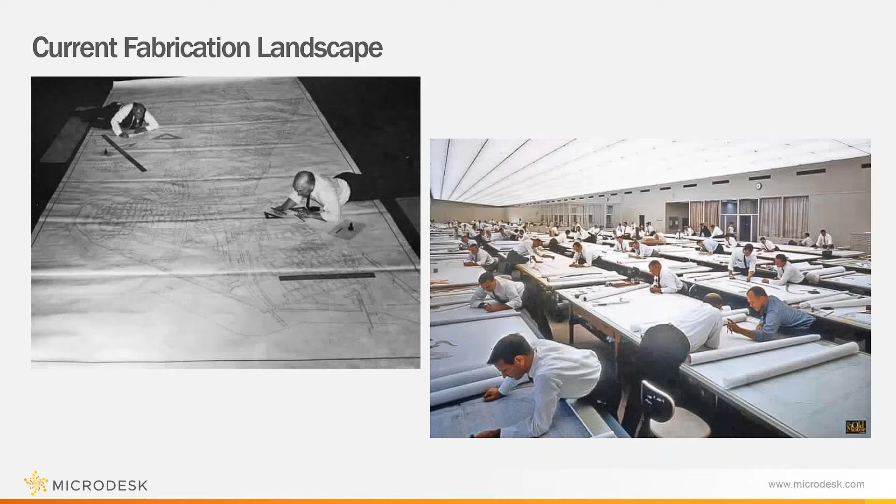It's still critical to this day. So I always like to remember, what was the point of this in the beginning? It was to get ideas on paper very accurately.

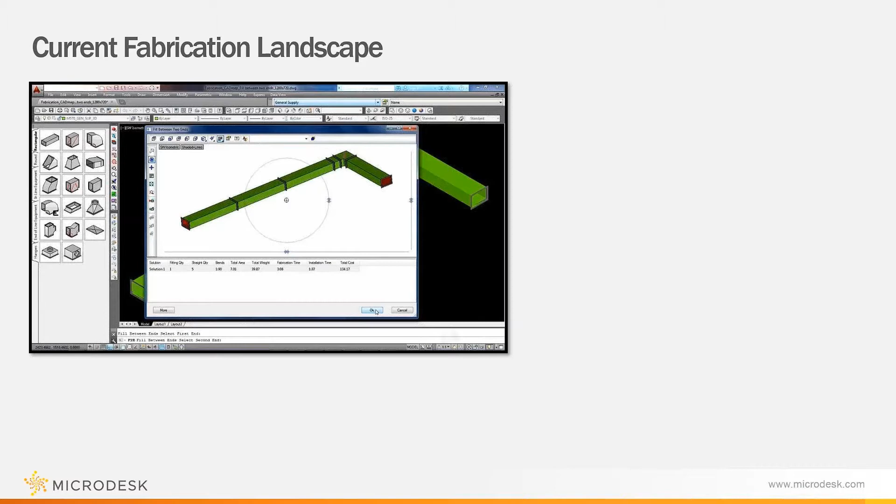Fast forward, today we're using very sophisticated software to create 3D versions of models, which also now contain data, cost, and hours to install. From here, we can send these digital representations to the real world to cut patterns and actually build directly from our designs and fabrication software.

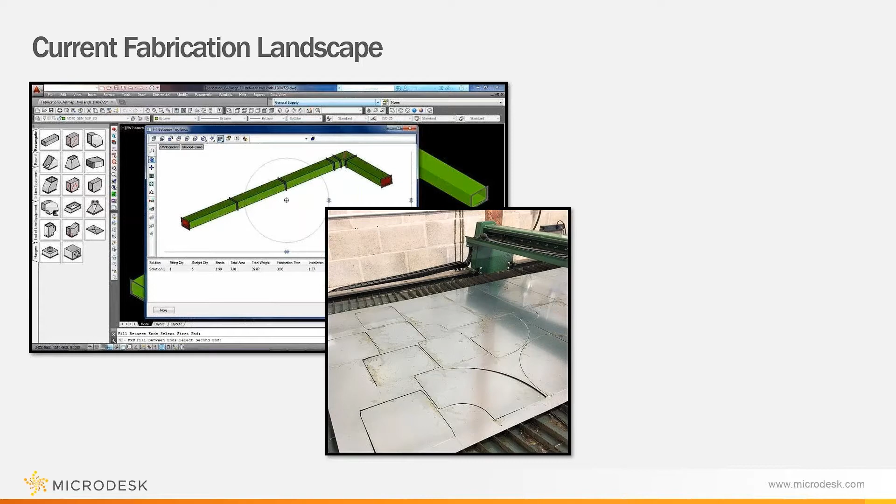In recent years, we've also started looking at coordination. It's one thing for us to build our sheet metal from software, but to coordinate all of that when the design teams or other contractors aren't in the same location or even the same part of the world—these are the things we're seeing, and we're doing a great job of coordinating these projects so that out in the field, we're minimizing RFIs, change orders, or just wasted time in general.

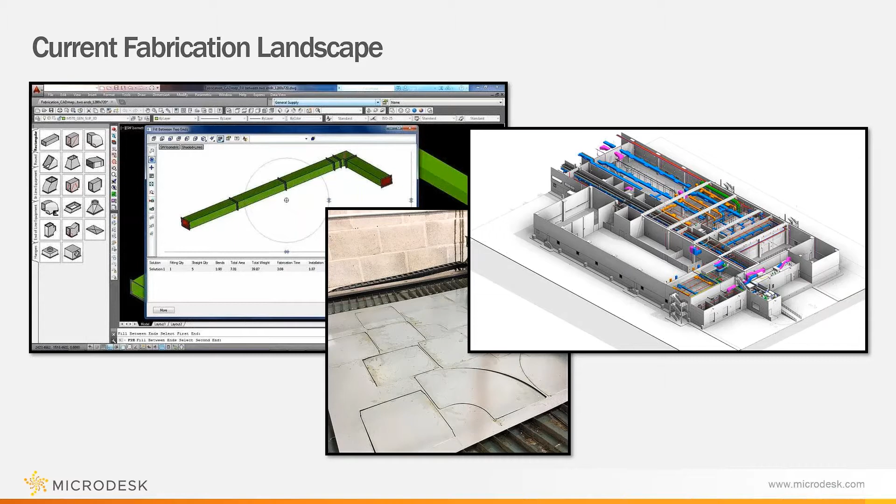So where are we going from here? Where are the trends? I think the big one is this new digital design lifecycle, where the owner at the end of the day wants to see all of the information that the design teams, program managers, and construction firms have added as an investment into the digital information of the project. They want to put a bow on all of that information and have it during the ribbon cutting, so that if we need to look historically at what happened, it's almost the memoir of this project.

This is really the common thread through projects these days: we need a means and a method of taking the information as it's injected into each phase of the project and making sure it's accurate, conforms to what the owner wants, and also making sure that when the baton is passed from the design team to the pre-construction team, that information stays true throughout and is readily accessible.

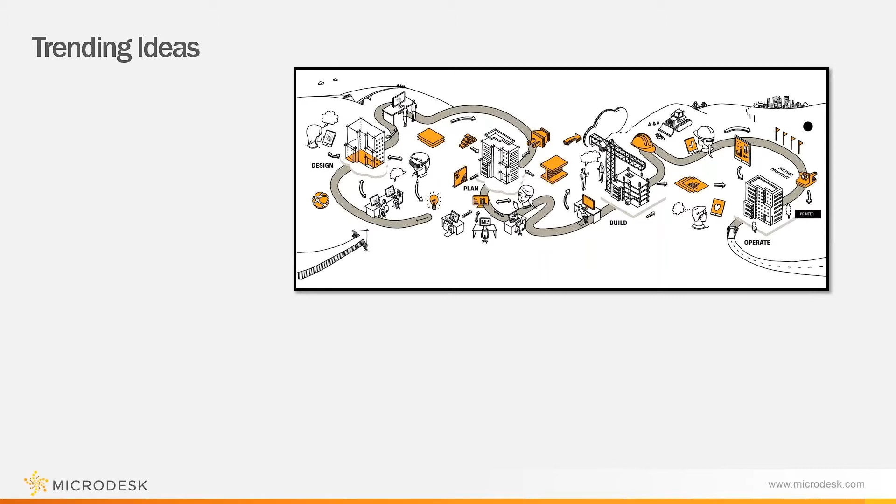As these designs become more sophisticated and accurate, we start to really look at whether they're truly digital twins of what's happening out in reality. I think a lot of folks want that. That's kind of where we want to get—almost an augmented reality where I could hold up my BIM model through VR goggles or on a tablet, look in the real world, and see that it actually was built the way we planned it. While we might not look for 100% perfection, we are striving for as realistic of a digital model as possible.

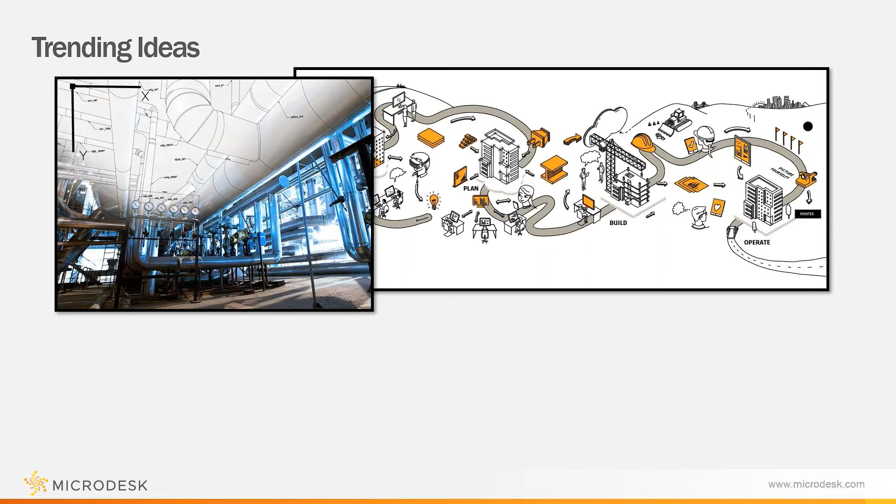I think what ends up happening is now we no longer have a single source of truth. So what is the latest version of the drawing? Is it the one on the iPad? Is it the one that I printed? And which one do I build off of? This is a very real problem we're seeing during design and, most importantly, during construction—I'm out in the field and I need to know, am I going to hit something if I run this steel, or what exactly is supposed to go where? It's up to the project teams to come up with that single source of truth to say, here's the latest and greatest version of that information that you need, and anything else is uncontrolled.

And we need to craft that solution. So when we think about all of those things together, the back of the house folks who sign the checks go, well, that's great—we've spent all this money investing in all of this digital technology, and the goal is for us to ultimately save money on these projects. We want to reduce RFIs, we want to increase safety, coordination should have been done at a desk rather than in a field, and that should all equate to profit. But how do we really make that happen?

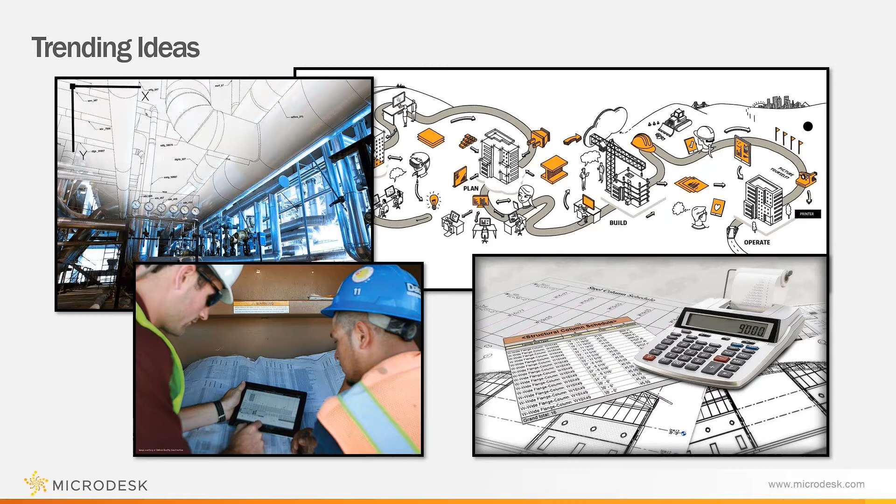They take up a lot of real estate up in the ceiling, so coordination is key. But it's also very time intensive for us to create these fabrication models. They're massive models with a lot of information in them, and we need to create documentation from there as well. So the tools that we're going to look at today are the spooling tool, the hanger tool, fabrication properties, renumbering, and tagging.

Spooling is a way of us taking some lessons learned from some out-of-the-box features of Revit in creating assemblies and just adding some nice quality of life features to them to align better with realistic workflows.

The hanger tool is just really a lifesaver when it comes to large projects. We can quickly lay out dozens, hundreds, maybe even thousands of hangers in a single click or a couple clicks based on some requirements. And what I like about it is that it also leverages the existing fabrication database, so it's a very controlled and expected set of hangers. Your modelers can't go off spec to put a hanger in.

Fabrication Properties is a new one to the list, and what this does is it kind of cracks the hood on the fabrication database within Revit to allow you to see some of the properties of each of the components that you're modeling from the database that currently aren't exposed in the traditional sense. And we can even kick those out to Excel for some data manipulation down the road.

Renumbering and tagging are really when it comes to the detailing side. We want to make sure that our bill of materials has logical numbering for our parts. And we want a means of consistently tagging our parts with numerous tags and making sure that the drawings look organized.

So what I have here is a somewhat nominal sheet metal and some piping model here in Revit. And these are all fabrication components that are modeled. And I have some equipment.

The first thing that I want to do is show how BIMrx looks from a ribbon perspective and the user interface. Microdesk has a suite of many other tools under the BIMrx umbrella that we're not going to be showcasing today, but we are going to be looking at fabrication.

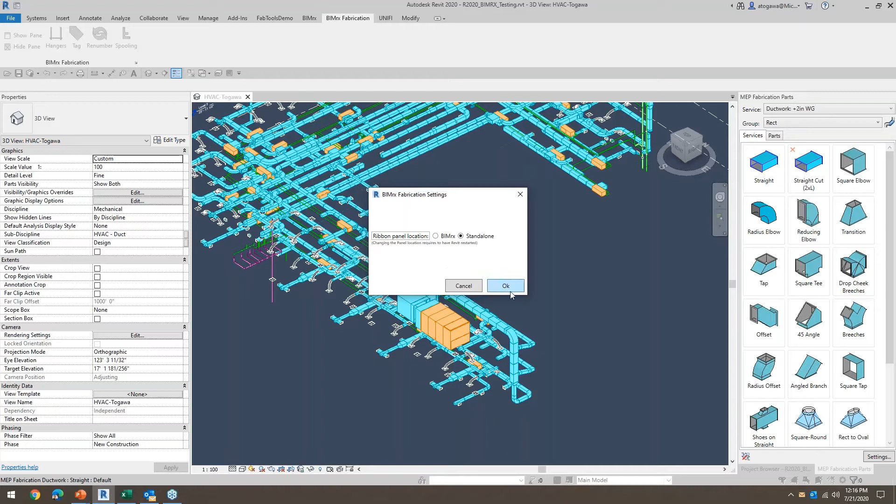One of the nice things about each of these tools is that there's a little feature which will either have it be standalone, which is what I've done for fabrication to make its explicit own tab, because as many of you power users on this call might know, there are a lot of tabs on Revit of add-ins, and it's nice to be able to either collapse it back into the master tab or break it out explicitly if you need that. So I've broken this out explicitly, and I'm even going to drag it down here so that I have it more readily available.

Another tool is BIMrx Core. This is a means of linking Revit, both importing and exporting, to Excel. I might leverage that again today, so I'm just going to keep those down here in the event that I need them.

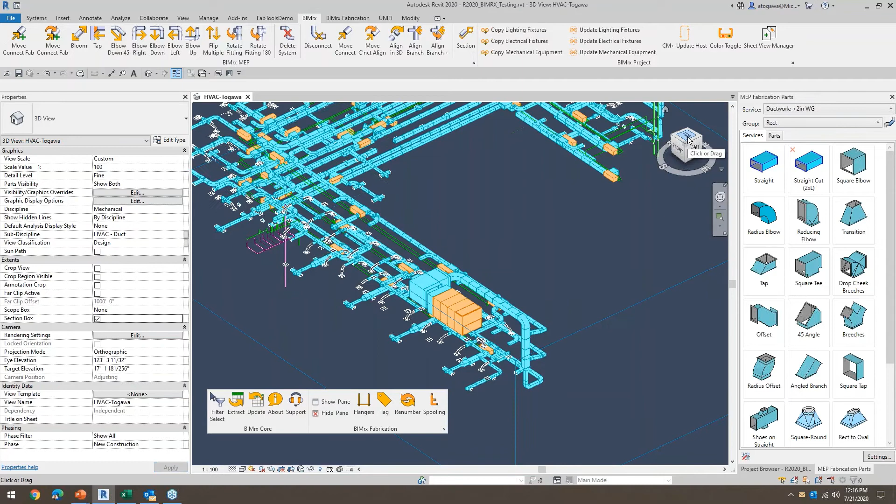What I'm going to do is create a section box, and I'm just going to work on a particular area of this work. And what we're going to do is start with some hanger layouts. So I'm going to crop this down to the area that I need.

And this is where we're going to be working today.

What I'm going to do is begin with laying out some hangers on this particular run that's going horizontally. So I'm going to click on the hanger tool. And the first thing we get here is the distribution settings, which are the distances between hangers and the distance from the start.

We have an option to attach to structure. What this does is take the fabrication hanger and shoot the rods, or the upper attachment, to a structural member, specifically slabs, vertically north or up from that hanger. And if it can't find any, it basically goes all the way up to the level above, to that level elevation.

And then attaching location points—this is for Revit native hangers versus fabrication hangers. Both of these are used for exporting to do site markings out in the field for embeds or deck inserts. As we know, fabrication hangers have these natively, so this option is added if we're going to use Revit families. We're only going to be using fabrication today.

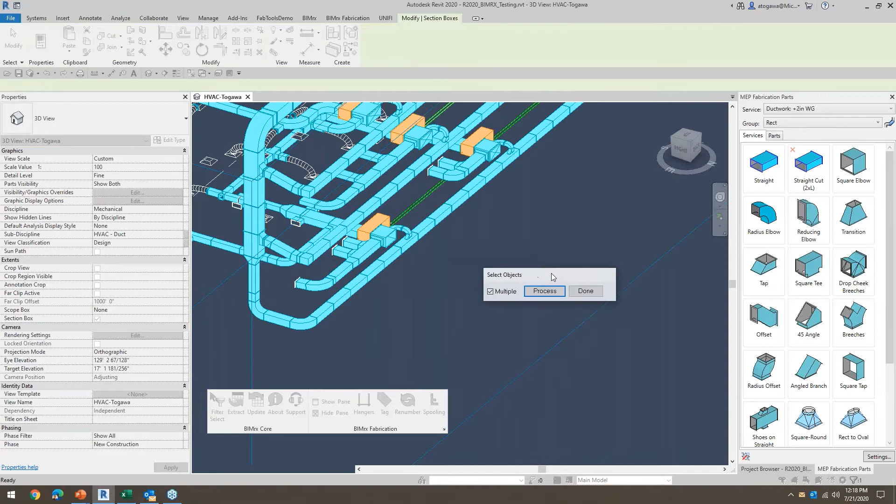So I'm happy with my 6-foot spacing, and I'm happy with my 12-inch from start, and I'm going to click OK. Then it's going to ask us to select the components that we need to hang.

I'm just going to hang a couple for now, just to show you how it works, and then after that we're going to look at a larger scale application of this. So I'm going to click on these two parts, and I'm going to click Process.

The tool then recognizes the service name from the fabrication database, and based on that service, these are the hangers that are available. I'm going to go ahead and click on trapeze hangers, and I'm going to click OK.

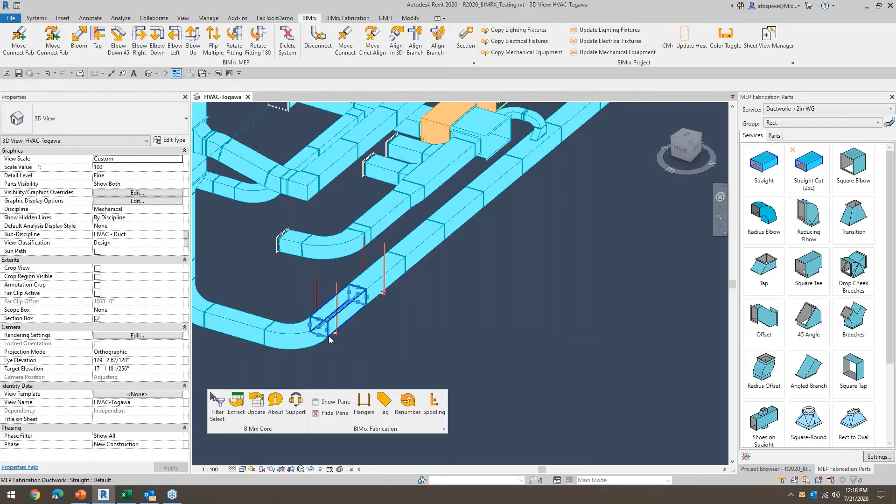You'll see that it placed them 1 foot from the beginning or end of this joint, and then 6 feet apart. And that was pretty quick.

What I'm going to do is show this on a larger scale to show how quickly this tool can lay out hundreds of hangers at the same time. I'm just going to bring my crop box back.

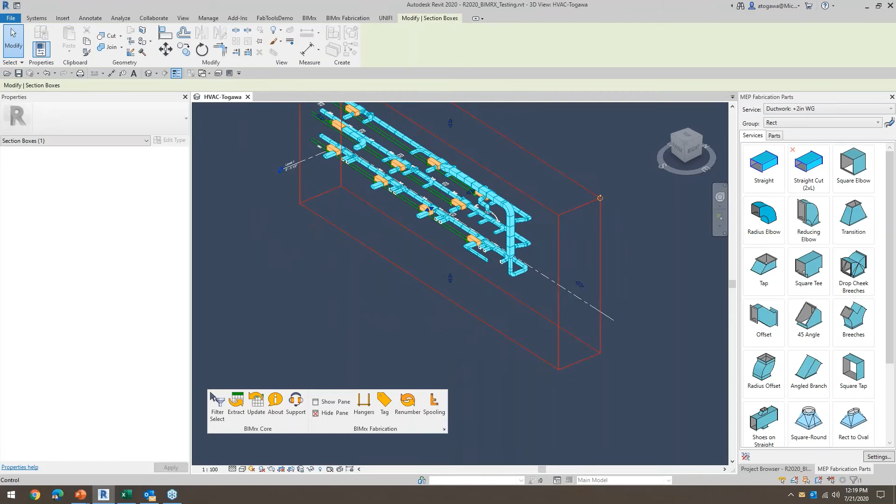So what I'm going to do is do it again with the same settings, and this time I'm just going to select all 3 levels. You'll notice that I'm box selecting. The tool is going to know what has hangers and what doesn't, and I'm going to click Process.

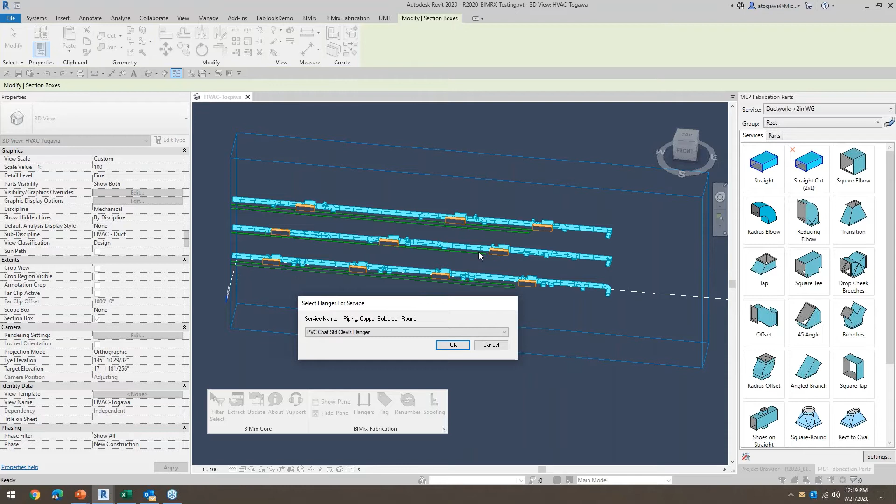Again, we're going to go with trapeze, and I'm going to click OK. It noticed that there was another service that I had selected—these green lines here, let's just say, are mechanical pipes. And again it said, okay, you have a service here for copper, and here are the hangers that are in. So we're going to go with Clevis on those, and I'm going to click OK.

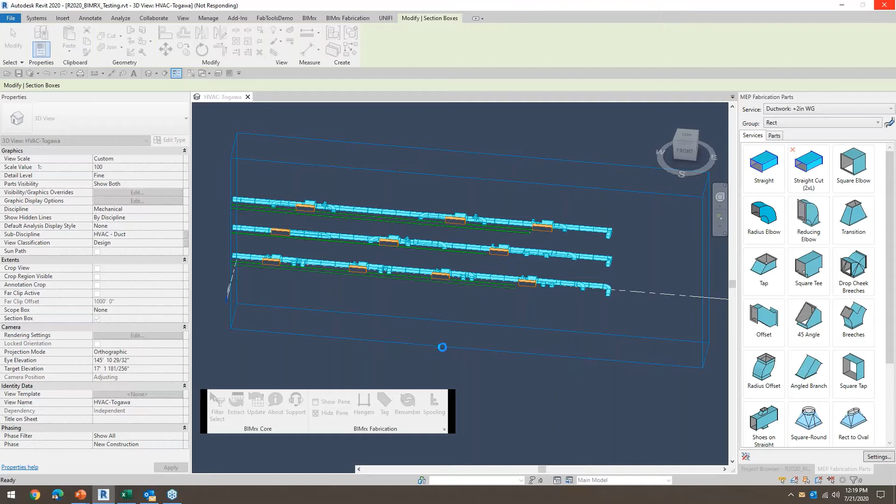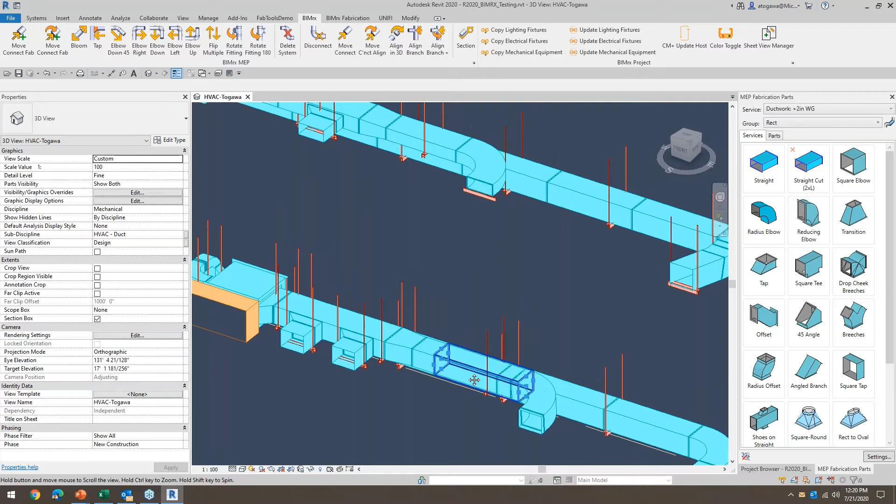So this iterates through, and within a matter of a couple seconds, we have all of our hangers laid out. Now, granted, we're always going to need to coordinate, right? But we're getting, maybe the 80-20 rule here, where we got the majority of these hangers completed. This one here is just off because of my crop box. But it did multiple services, at the right size, right location, right spacing. I can always go in and edit this as I need to, but to get this done, there's no better first start.

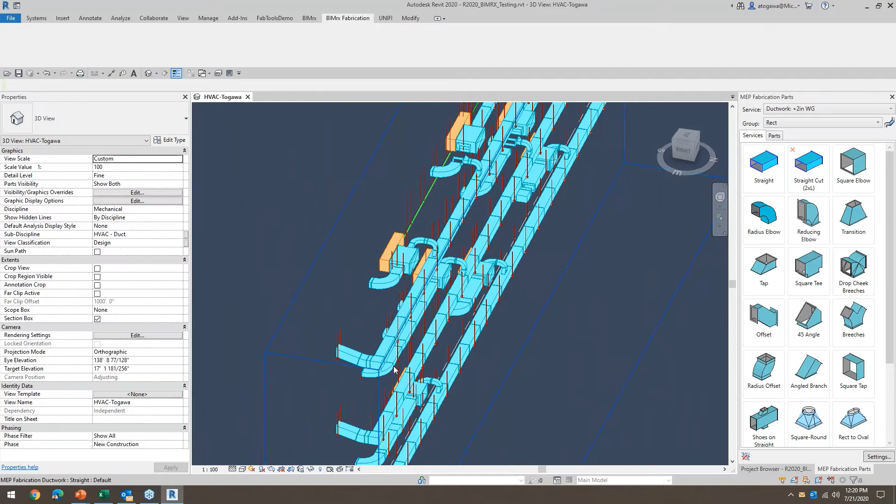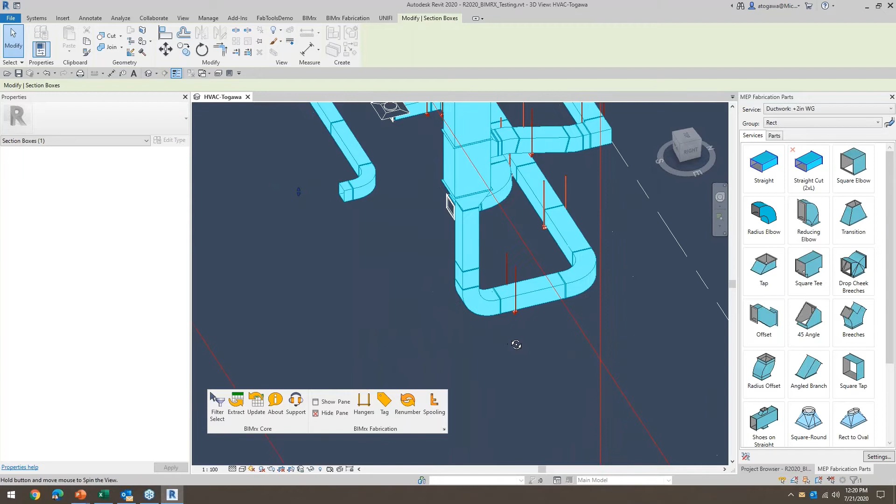Okay, so the next set of tools that I want to look at are going to be the spooling tools. Now that I have my hangers laid out, I'm ready to start identifying the spools that I want to create. We're only going to create a few for this webinar, but keep in mind that internally we use these tools heavily for large scale applications, thousands of spools in a Revit model.

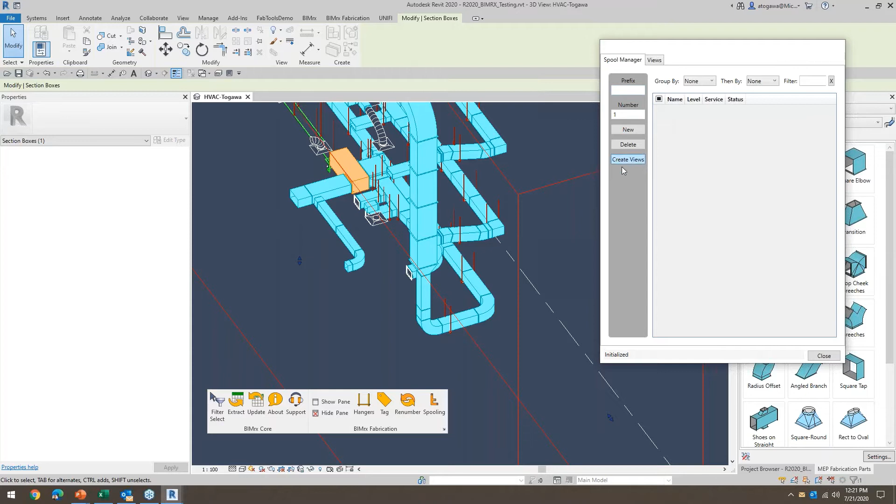The dialog box is organized so that the gray area in the middle is where all of our spools end up. The darker gray area is where we create the naming scheme, create new spools, and perform actions on them. Then we have a View tab, where we set up settings for later, like what types of views and what title block we want when creating these assembly drawings. I'm going to put my initials in as the prefix, and we're going to start with 1.

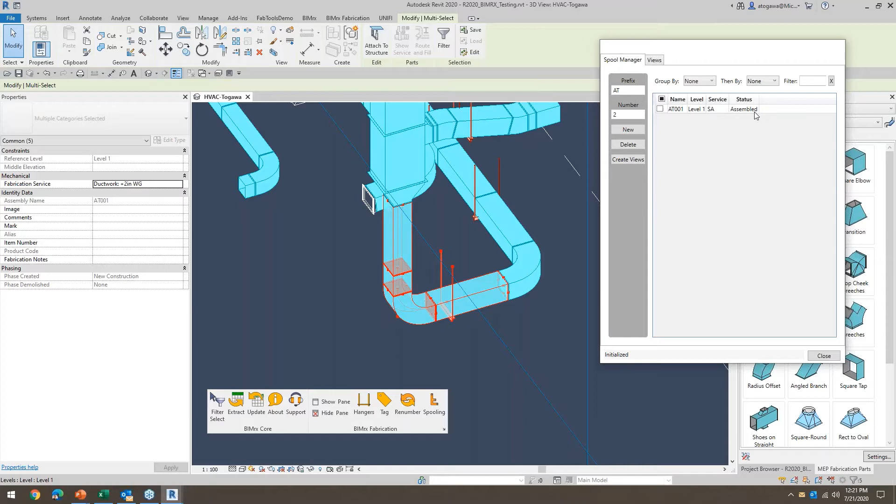I'm going to take this run right here as our first spool, click New, and you'll see that it generated it here, along with the level number. The status is assembled, meaning it's not fabricated, installed, or shipped. It also shows the service name and the level it came from.

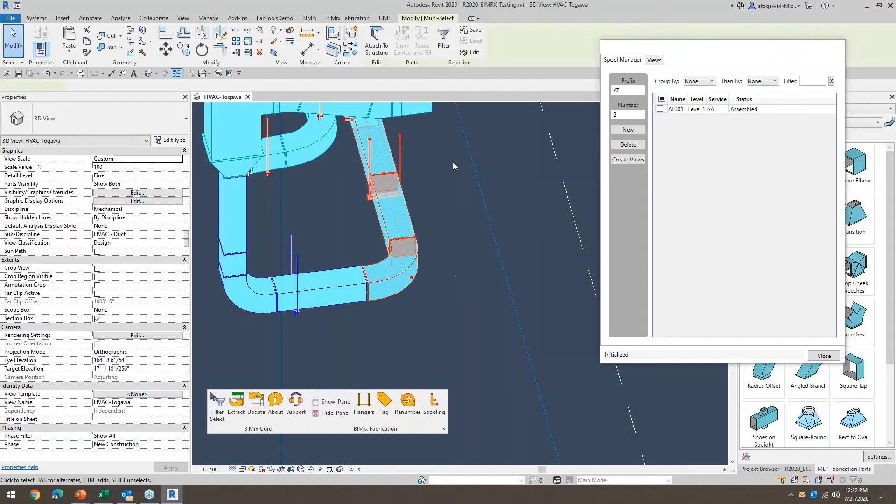Those of you who have used CADmep know about the color coding option, which we've brought over as a legacy feature. So this particular spool is blue, and when I generate the next spool, we'll see that this one turns red. So I can kind of see my spool map straight from this 3D view.

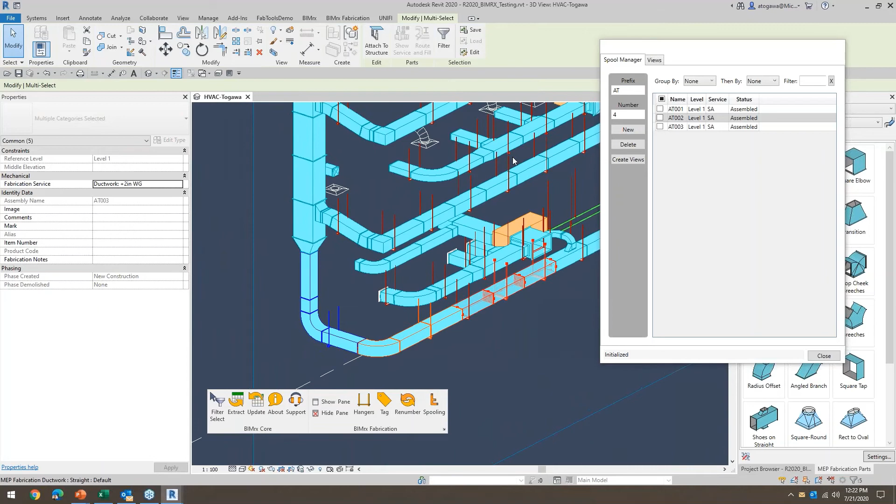I'll generate three more. So I'll go with this one here, and then we'll generate one on a higher level just to show that the level information gets updated. Okay, and we'll see level 2.

Four spools is nice, and I can see them all here, but when we have 1,000 spools, this list can get cumbersome. So we've introduced the option to filter by two different criteria from this table. Let's say I want to look at level first. I can see here that I have 3 on level 1 and 1 on level 2, and I can drop that down and see them nice and organized here. This really helps me keep everything organized.

I can even start sorting by the service type as well. I only have one service type loaded into this project, but I would see my supply air, my return air, my 2-inch water gauge, whatever the system abbreviations are, grouped there.

The other nice thing is the filter. I can search for any characters here, or just one. It doesn't really matter, since there are wildcards on both sides so it's inclusive of whatever you're searching for. So as a combination of grouping and the filter command, you could really dial in to find the spool from your model that you need.

What we're going to do next, now that we have these spools defined, is create some sheets and views for them. I'm going to head over to the View tab and pick my 11 by 17. I want a plan view, and for this particular one, I'm just going to go with a 3D view and a ductwork schedule.

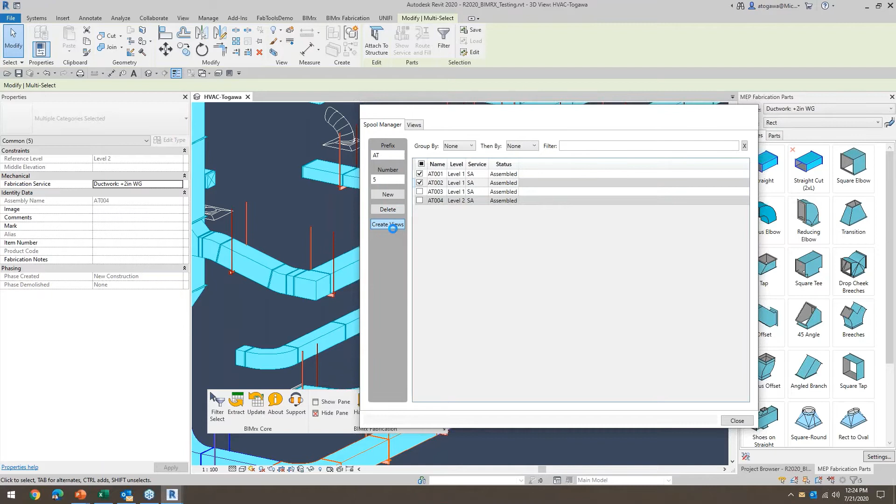I'm going to click on that first spool, or let's do 2, and click on Create Views. You'll see here at the bottom, confirmation: 2 spools created and 0 failed. I'm going to head over to my project browser, and you'll see that these are now under assemblies, the 2 that I just created, and you can see here that they're now spooled. I can now go in and look at those sheets.

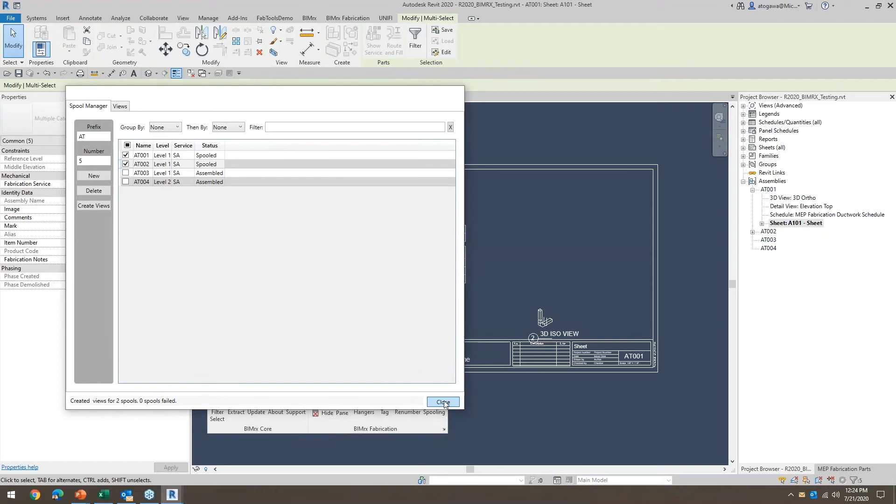At this point, I'm just going to do a little bit of cleanup work, taking this, maybe adding the view template that I liked, setting my plan view over here, setting my 3D view over here, changing the scale to 1/2 inch, and I'm pretty much ready to go with detailing.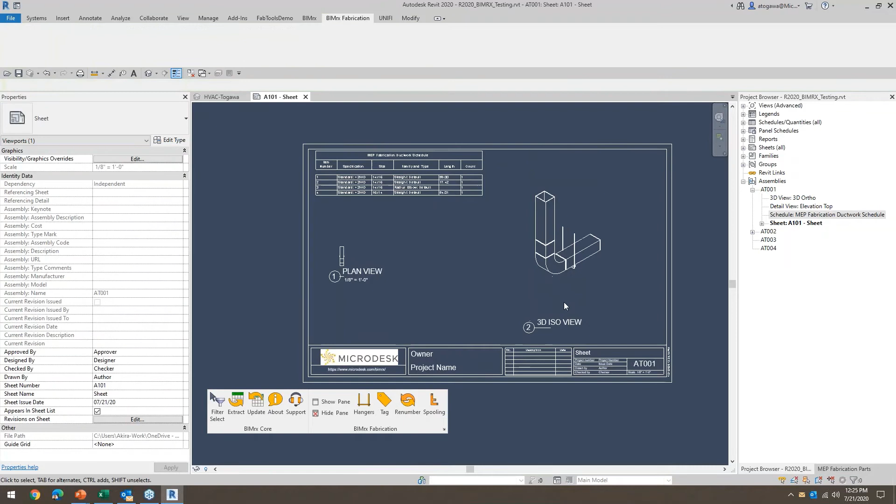What I'm going to do first is go in here and tag these with the mark number. And I'm just going to detail this out.

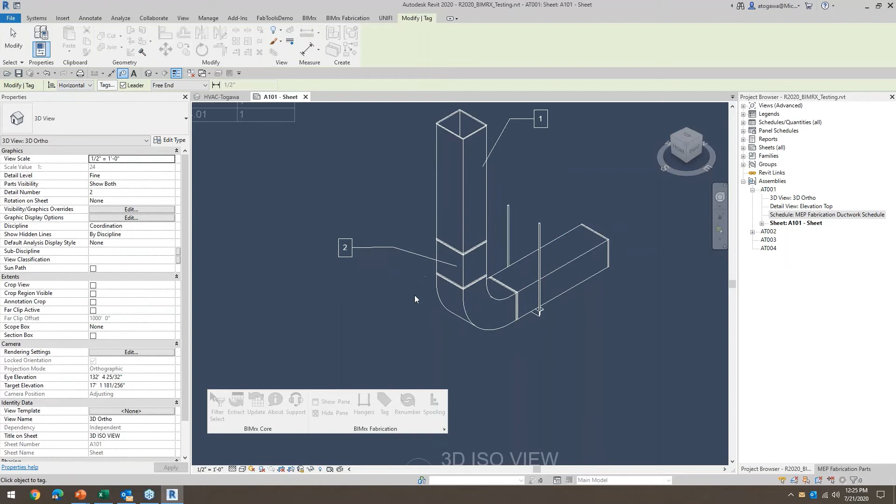Okay, great. So within a couple clicks, I was able to create a bunch of spools, create the sheets, create the views, get a bill of material on here, and I'm pretty close to done.

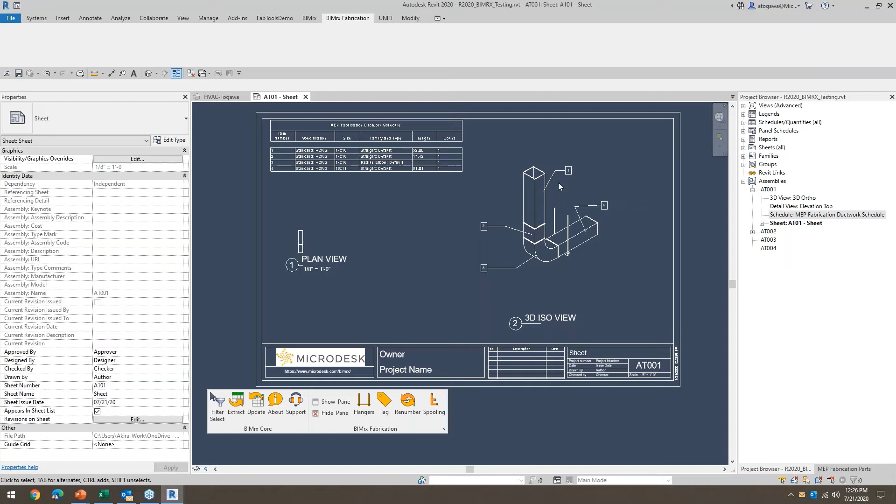What I'd like to look at next from the fabrication set as we go through this process is the Renumber Tool. The Renumber Tool is just a way of taking fabrication parts, their item numbers, and assigning logical orders of item numbers to them, or grouping numbers together.

I can give you a good use case right here, which would be, maybe I'm not happy with the order that these numbers go. This is completely preferential, but maybe I want to go 1, 2, 3, 4 in a different direction. So I'm going to fire up the Renumber Tool.

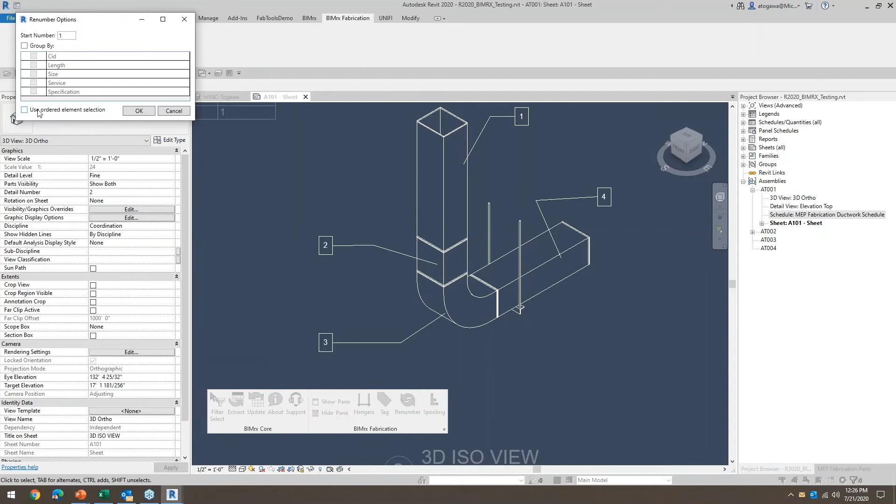I'm going to check on this button, use ordered element selection. What this does is it allows me to pick the order that I want my numbers to go in. So I'm going to start with 1, 2, 3, 4, and hit escape. You'll see that these numbers have all restacked.

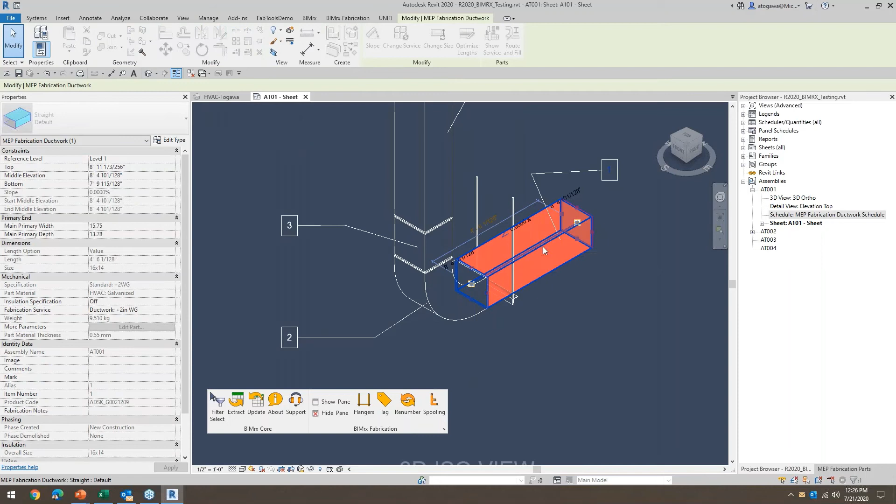Nice clean way of doing this, which would be, you know, if I had to do this the traditional way, I'd have to select that component, I'd have to go in here. It's kind of grayed out because I'm in the assembly. So it's just a very easy way of us renumbering these objects.

Another way that we renumber is if I go to my spool map and I start to click on some of these objects, we'll see that this is item 1. This is item number 198. Here's another 198. If I go in here, this is a 1, so they're inconsistent. Maybe I want these all to be the same item number.

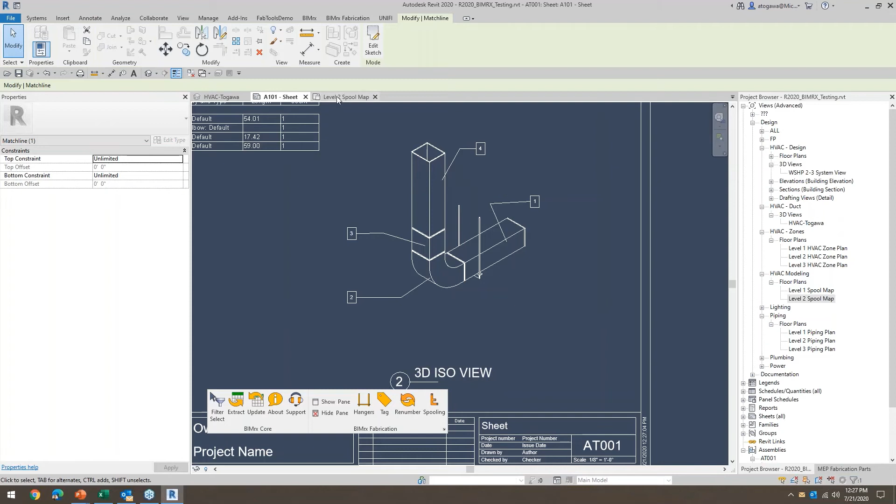One thing to note is that when we're using the spooling tool, it does automatically renumber all of these parts, as you saw here before, 1, 2, and 3, at the time of spool creation. So you won't have to necessarily do this on a large scale for your spool maps if you're creating assemblies, because it does it automatically.

But sometimes we just need to make sure that these are all the same number for other reasons. So what I can do is I can go in here and say group all of these that have the same length and give them the same number. We're going to start with 1, and I'm going to click OK.

I'm going to click on all of these duct runs that we had before, and I'm also including the hangers. That's okay because they're not similar. And I'm going to click Finish.

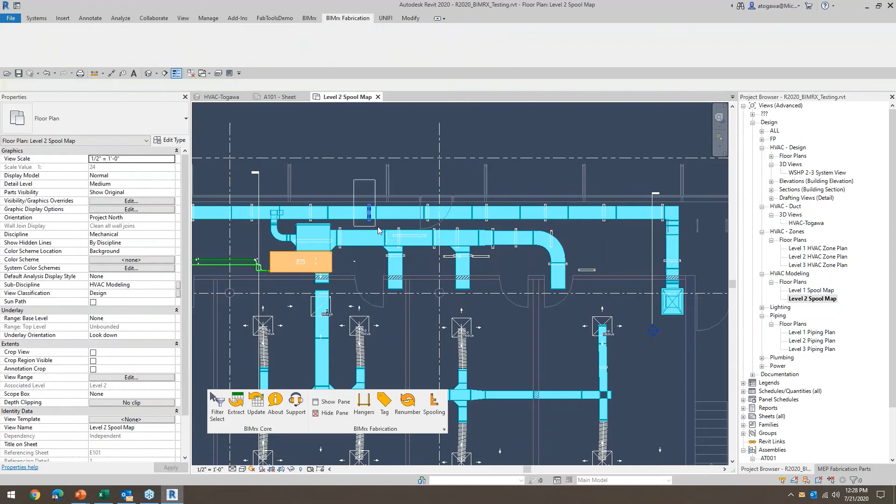And now when I go in and I inspect these objects, you'll see item number 1, item number 1, item number 1. So now they're all consistent. These are now item number 2 because they were the other group of objects that I had selected.

Great. So once all my renumbering is done, the next thing that I want to do on any project is probably start tagging or annotating my spool maps or my drawings. And so that's where the tagging tool comes in.

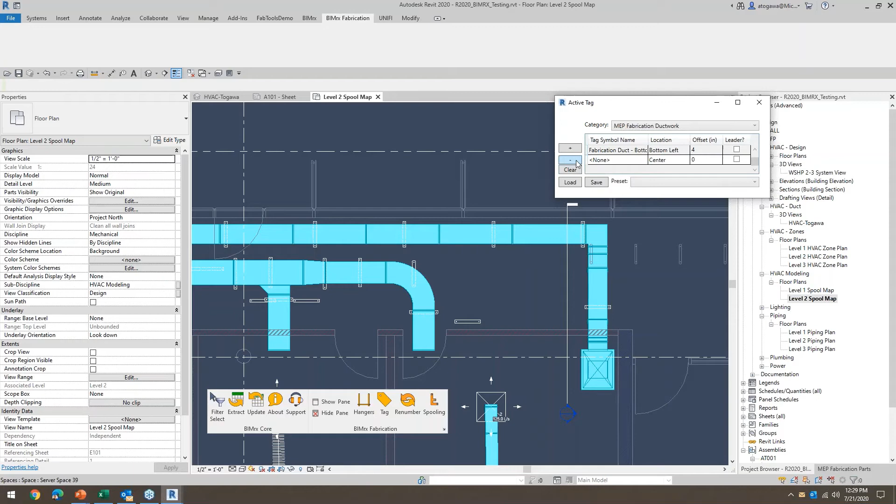So our tagging tool, the way that it works is we have specific categories that we're offering to tag, and I'm going to start tagging my ductwork. What I want to do is I'm going to clear this out. In a traditional sense, sometimes we have the length or the size on the center of the duct, and then we'll have maybe the bottom of elevation at the bottom, and some other information at the top.

So the traditional way that we do that is we either create a single tag that contains all that information, but it doesn't really allow us to move the individual pieces or fields around because it's a single tag, or we end up tagging each of them individually and then managing the locations of them as they go.

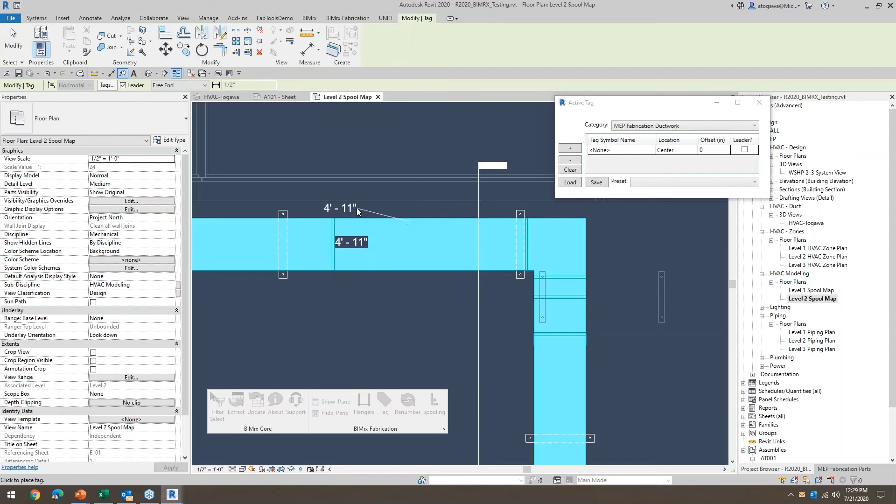So it might be like this, where I go, oh yeah, this is the item number. And I didn't want it like that, so I'm going to get rid of the leader line. I'm going to move it here. I actually don't want that. I want the length. Great. Then I'm going to put another one up here, and I want that to be something else. So it's a very time-intensive task.

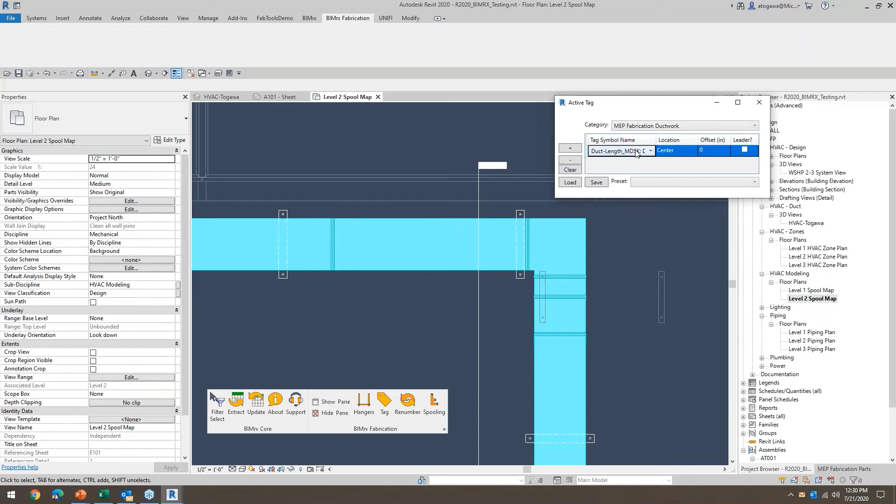So what we can do is we can create a pre-laid out format for the ductwork. So what I'm going to do is I'm going to say, okay, the first thing that I want is the length, and we're going to put that in the center. With this actively open, I can try it out. So with something set, I simply just select and we see it's there. Okay, pretty cool. So now maybe I want to put the bottom of duct elevation at the bottom.

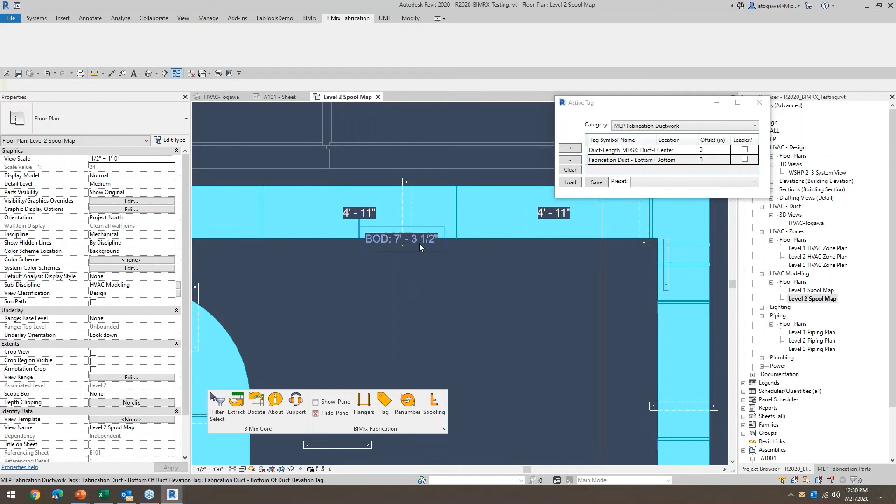So I'm going to select bottom elevation, and its location is going to be on the bottom. Let's move on to this one and take a look. Okay, pretty cool. But maybe I want my bottom of duct to be justified to the left, so I'm going to go bottom left and check on this.

Okay, we're looking good, but now maybe I want bottom of duct. So it's good where it is, but now I want it offset from that duct a little bit, so I'm going to add an offset to that.

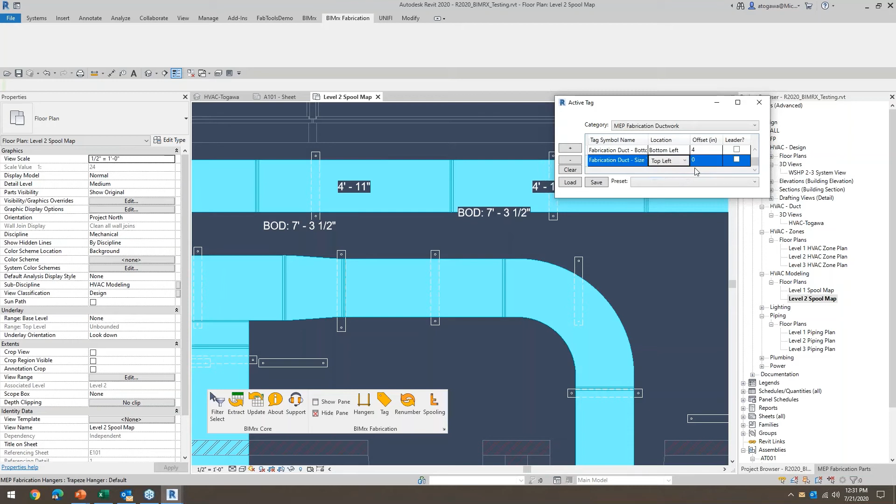The last thing I want to do is maybe put the size, and we're going to put that on the top left, and we're also going to offset that by 4. I'll try it on one more piece here. Okay, perfect. So this is exactly how I want it.

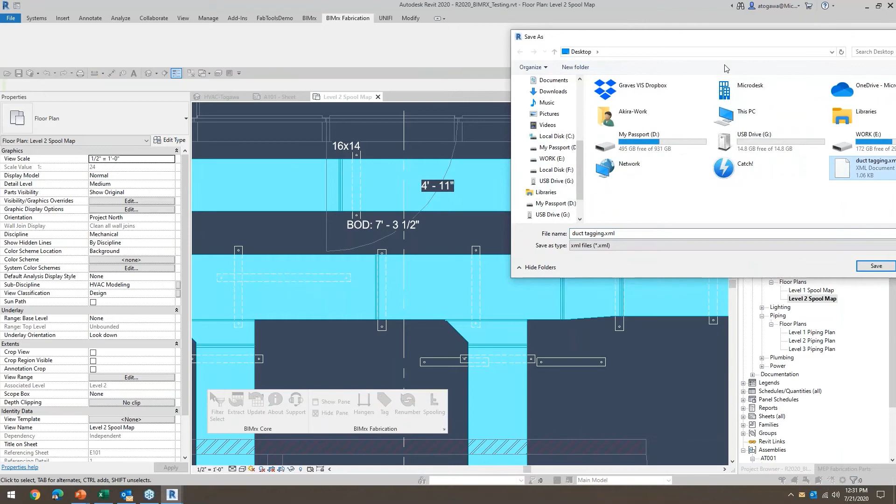What I want to do is be able to recreate this even if I close down Revit and open it back up, or even if somebody else starts detailing, I want them to have this same setup. So what I can do is save this on my desktop as an XML file of configurations. That allows me to either email it or send it to someone, or keep it in the project folder, and we can just load that up whenever we need it, and it'll allow me to continuously tag the ducts. I can do the same thing for pipes.

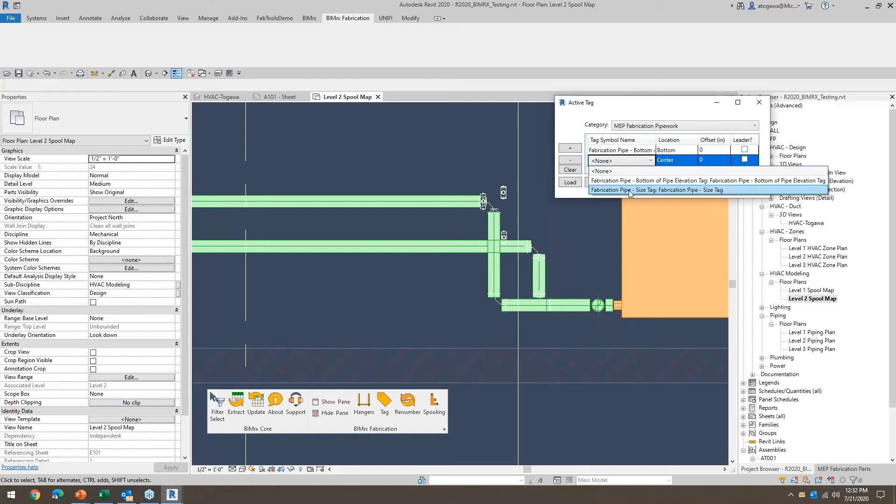Let's go over here and approach the same methodology. Let's remove all of this. We're going to go to fabrication pipework, we're going to add, let's go with bottom elevation, bottom. And we'll say size, center, it's fine, and we'll go with that same offset. Let's try that out. It's a long run. Okay, looks good.

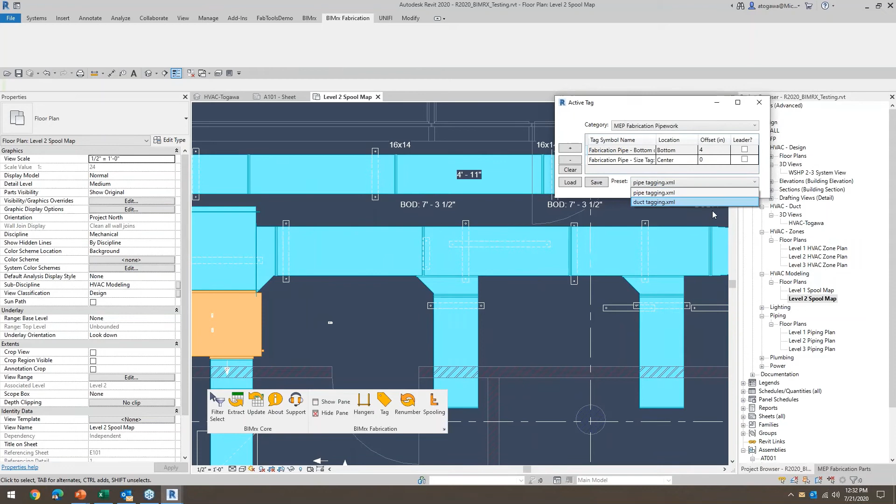So what I'm going to do again is save this, and this time we'll call it pipe tagging. Now that allows me to quickly jump back and forth between the two. I can go to duct tagging, load up that configuration, tag this, go over here. I probably wouldn't be doing this in a realistic scenario, but it's nice to have all of these options to just switch between setups.

What this does is, the biggest thing for me is knowing what the default tag is that Revit has set for that category. Sometimes it's 50% I need that one versus 50% I need the other one, and you never get it right. By being able to explicitly say I want this particular tag at this particular location, and even adding multiple other tags to that arrangement and saving it for later, it's a great workflow.

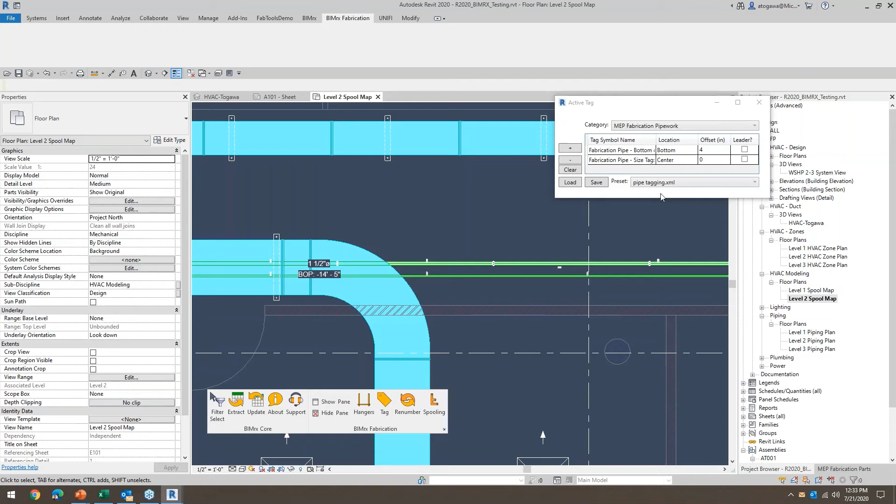All right, great. So the last tool that I really want to look at today is one that I mentioned earlier. It's new to the suite, and it's the Fabrication Properties.

The way the Fabrication Properties works, if we select a fabrication part in Revit, here's what we currently see about that object, right? We see some basic stuff: level, elevation, service, identity data, and phasing, which is common to probably any part in Revit.

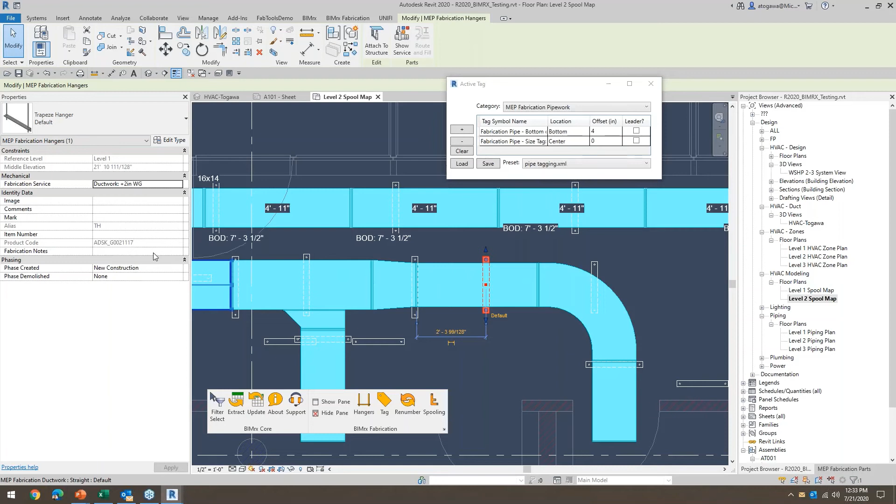But we know there's more to this than just that. There's geometry and maybe materials, product codes. None of that is available to us. There are some offerings out there that will get you that information, but what they require you to do is create more parameters or more properties in your model, and you're syncing that information from the database to those properties. It's not live in the traditional sense.

What we wanted is a solution that was live, and even more than that, what can I do with that data? So we created the Fabrication Properties, and it doesn't describe it here, but it's a pane that we show.

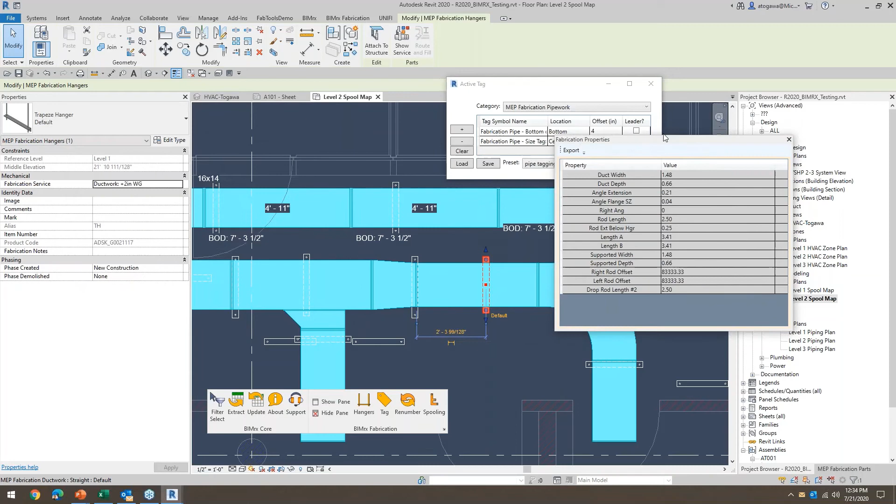Here it is, and it's dockable. So I'm going to slide it over here, and we're going to look at these side by side.

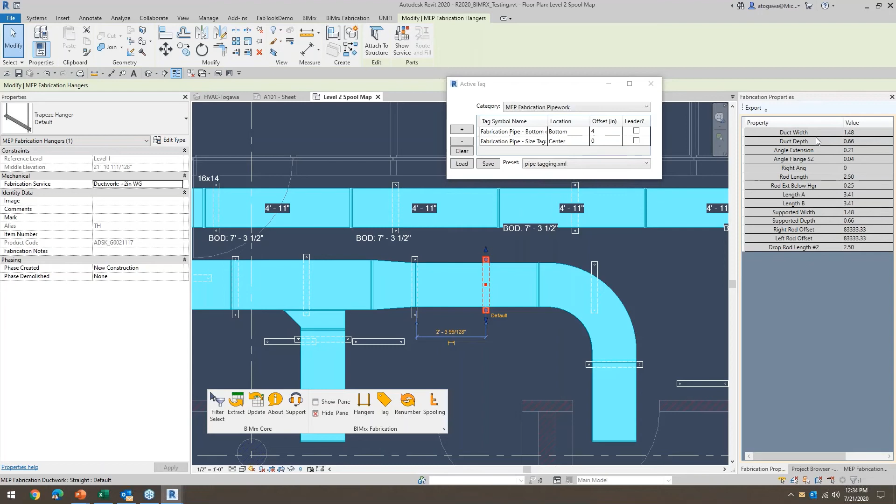With the hanger selected, we omitted some of the information from the fabrication properties, which are already shown in your traditional properties. I don't want you to have the same information shown in two different places. We're really just looking at the specific information about that hanger, or it could be this elbow. There's a lot more here, so these are dynamic. Anything that we need to know about that object from a fabrication perspective is here.

I'm going to go back to the hanger for a second because the rod length, for example, that's a big one, or even the duct size that it's being hung off of. So you don't get that information here. What size is that hanger? I don't know if I look at my traditional properties, but I can certainly tell from here.

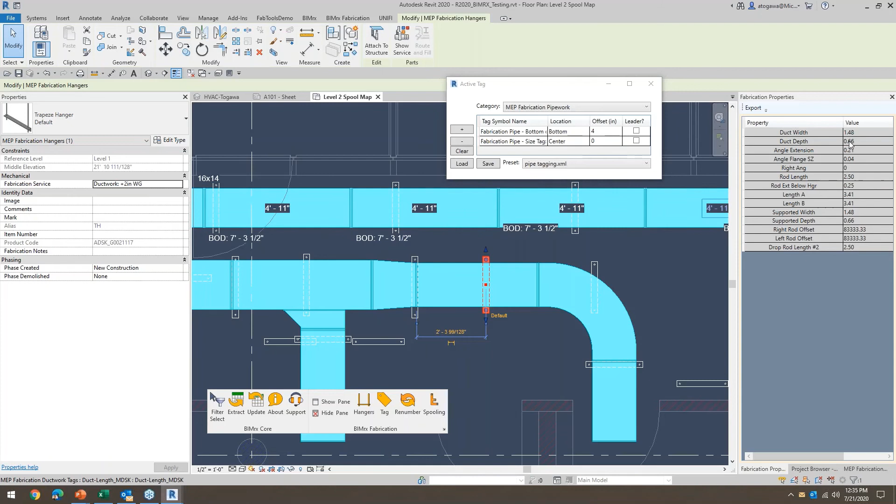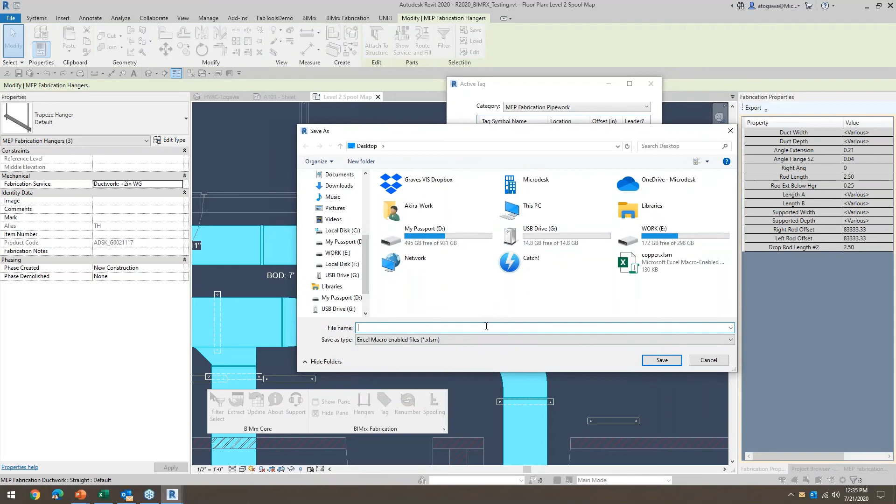Another great thing about this tool is I can click on, let's say, multiple hangers. You can start to see that the lengths start to say various, because I'm able to select multiple, and obviously we don't want to see that information here, but I do want to know something about it. So I can click the export button, and let's call it hanger out. So it exported them, and I can open this up.

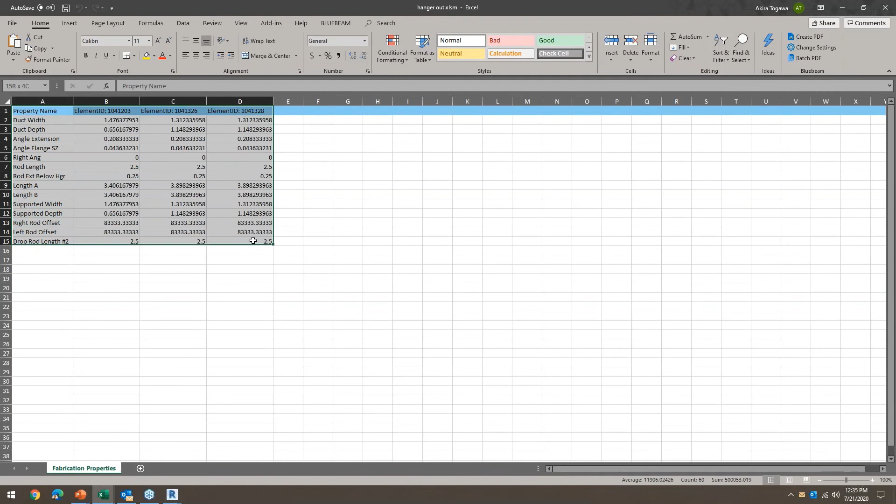The current syntax works that individual components are stacked as columns, but I like to see my information this way, so I'm just going to do a quick transpose. Now I have the element ID of the object, I have its sizes in feet, I know the rod lengths in feet, and some other information which you could cross-reference back to the images in your FabMep database.

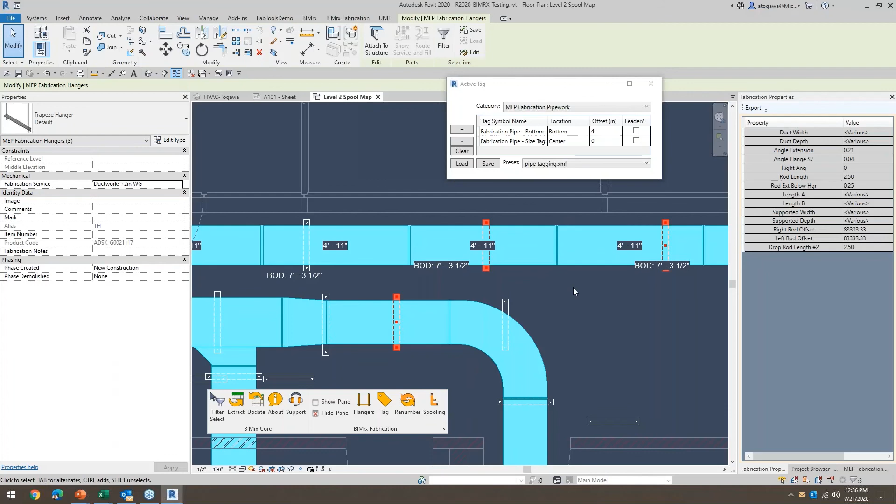I think this is very useful for us in getting quantifications of objects within Revit that are fabrication parts that we usually can't get. I can even take this part and show how dynamic it is. So let's scroll down, and we see here the overall size, 18 by 8, right?

So if I change that to, let's say... well, that won't work, but let's see what happens. Let's draw a new one. Okay, we'll go with 12. So we can see here that this information is live. When I go and look at my size, it shows 0 by 0. Unfortunately, that was a bad size to put in.

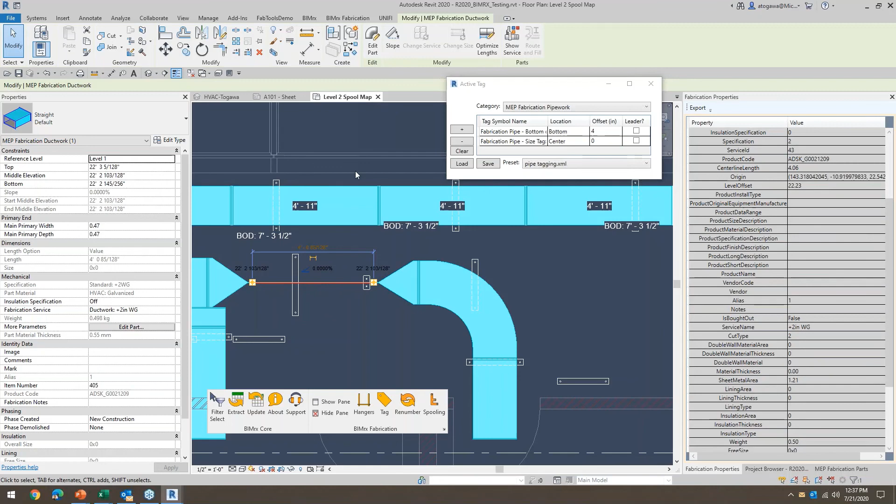But the fact is I don't have to refresh or reload anything. It's live, giving you the information of the object as you select it. What it's doing is querying the database configuration that's loaded into the project and the object you have selected, to give all of this information to you.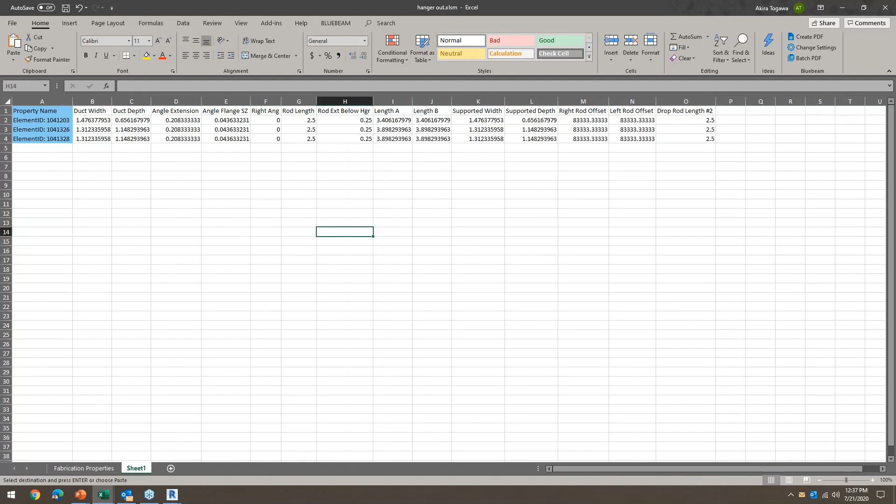What I could do is I could even take this whole run, right? And I could export this, and we'll call this 2-inch water gauge. Look how quickly it can query that information for me. What I can do is open this up, and do the same thing I did last time, which is just transpose that information.

Now what I can do is I can maybe find length, right? And then I can go down here and quickly tell you that I have 370 linear feet of this particular duct run, right? So for estimating purposes or whatever it is that you need. Now, I know schedules can do it, but I'd rather not have to spool up a schedule just for the selection that I have. It's great to be able to do this.

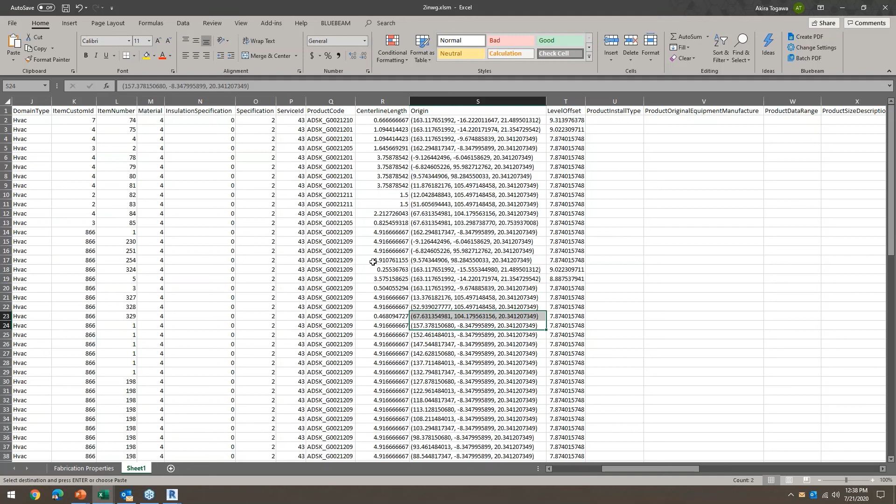Okay, so we have about 20 minutes left, and what I'd like to do is turn it over for questions. I'm happy to go over any of the features again, or look at other ways that they can be used, or just answer some general questions about how we're leveraging the fabrication database or Revit to construct projects.